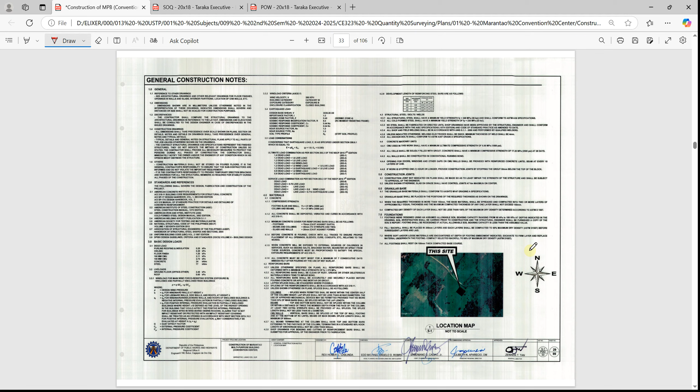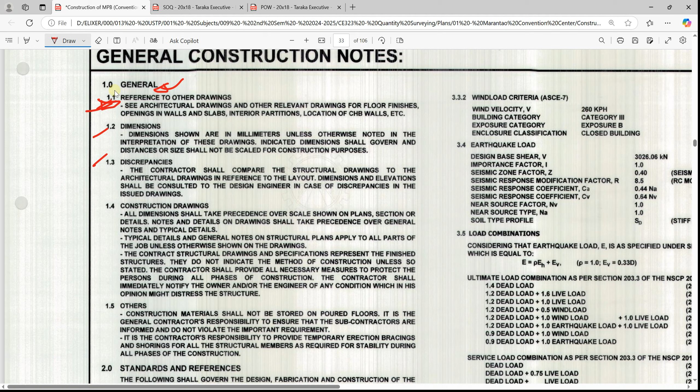We have here very detailed specifications. For example, kani general, sa may nasa kuan, general. Butang na to pinakauna. Kung naay discrepancies sa dimensions, the plans, as the designer kung may mga kalibugan, clarify. And then iya pong giingon diri nga see architectural drawings and other relevant drawings for finishes, walls and slabs, interior partitions, location of CHB walls, etc. Because these things are not structural, they are part of the architectural plans. Asang wall, asang openings, etc.

Standard references, yung tanawin diri for the structural plans, may mga references na to. For example, American Concrete Institute, ACI. Unsa nga mga codes involved? 318-11, SP-17, SP-17A, ACI 315. And then we have also AISC, AISI, the American Welding Society, the ASTM. Of course, di mawala si NSCP, the ASEP Handbook, the UBC, Uniform Building Code, the DPWH Design Guidelines, Criteria, and Standards.

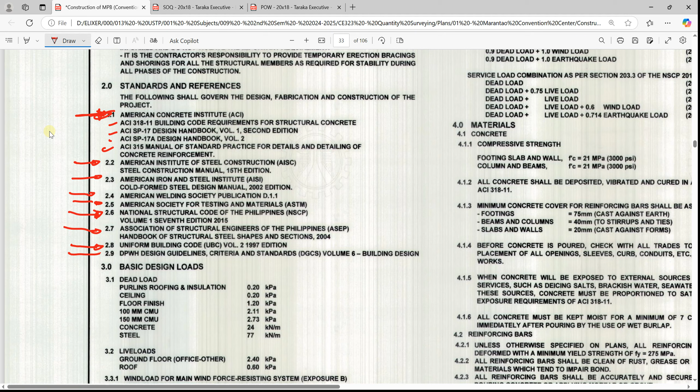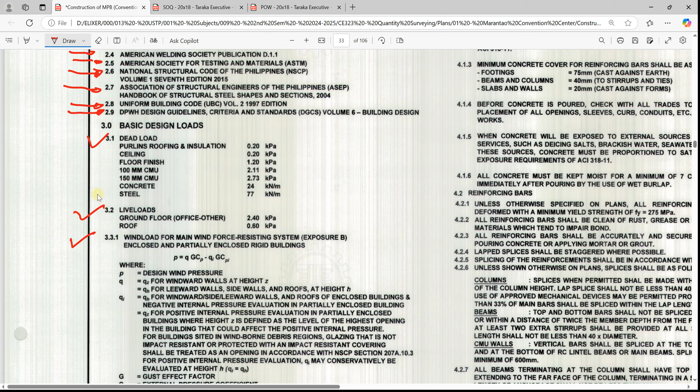Aside sa mga codes, kaning mga loads na to, we have si dead load, si live load, yung wind load. Actually, we have an updated version of this one. Kani medyo karaan na, ng 2015. And then kung nato yung dead load, live load, wind load, dapat yung mga wind load criteria - the wind velocity, yung si category of the building, exposure type, and enclosure classification. We have also the earthquake load.

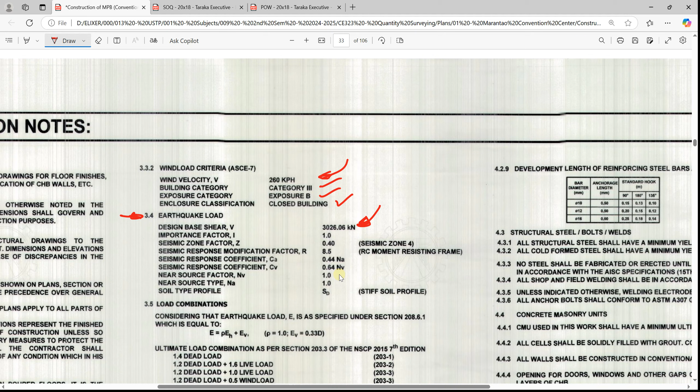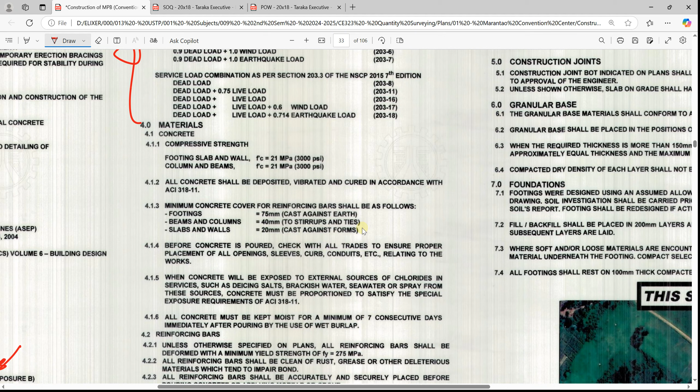So in your next year, you're going to have the earthquake engineering, mag-calculate mo ng seismic or earthquake load. For this, nakabutang gino sa dira kada plans nga ang iyang design base shear is 3026.06 kilonewton, kung sa mga factors involved, and etc. And aside sa mga loads, we have the load combination nga gigamit. And then the materials, the compressive strength, the clear cover, etc.

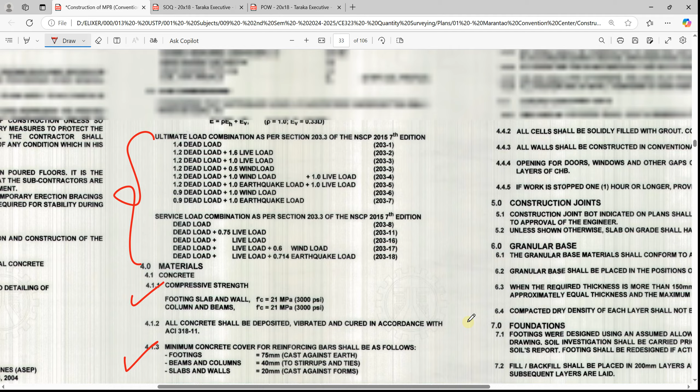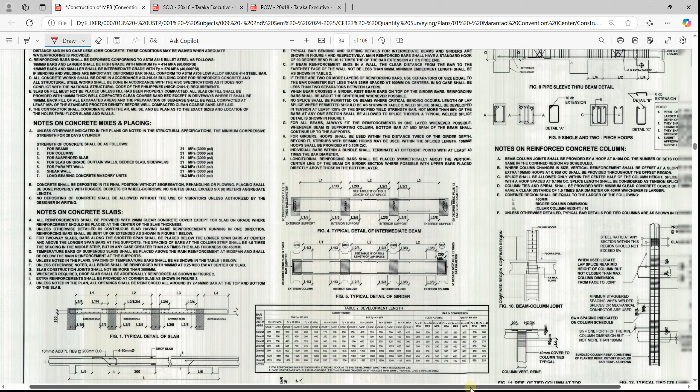Mga work specifications, these are also being presented here under the general notes. Napakaninay din kaning sa mga bars, sa dapat pakaplastar - mga splicing, bends, development length, and others as part of the general construction notes.

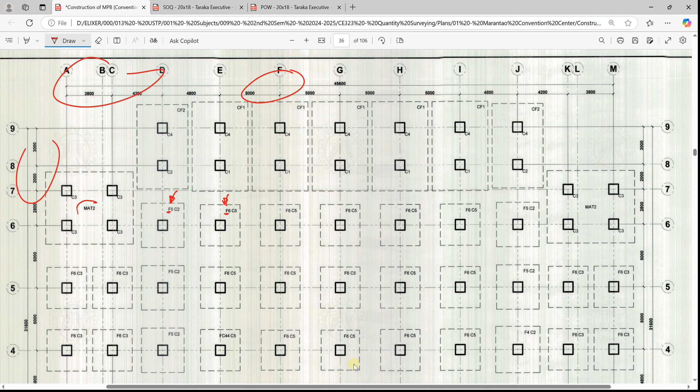Now, first nga plan is we have the foundation plan. Sa foundation plan, let me zoom this in. Sabi na foundation plan, sir. So, we have the grid lines, the dimensions, and diri sa foundation plan, imo na makita kung unsa nga foundation mo gigamit. For example, diri we have F5. Diri we have also F6. And then diri, we have MAT2. Na diri po si F2, si F1.

Unsa man, sir? So take note that these are what we call the marks. So for this one, this is the foundation - this is the foundation mark or markings. Mura siya kuan ba, mura kudigo nimo or name nimo nga para nga foundation - Footing 5, mat 2, CF1 is combined footing 1, etc. So depende po na kung sa imong gamiton diya nga pangalan.

And then in the foundation plan napod kay column marks. Natay C2, natay C5, C3, we have C4 diri and CC2. So take note, generally in the typical plans na may makita nga F1, C1, F2, C2. But take note na hindi sila always true nga si F1 yung pares with kay si C1, and si F2 yung pares with kay si C2. Ang naman si F1, F2, this denotes what type of foundation is there - murag pangalan niya, kanimo ni si footing 1, footing 2. Kani si C1 o CC2 po, mo po yung pangalan ni column para dira.

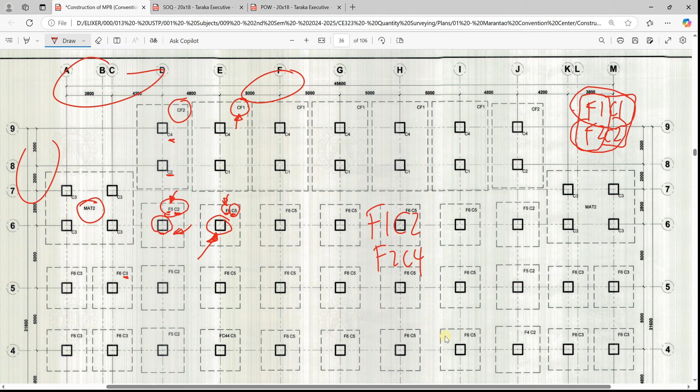So for example, ani you have the F5, C2. So sa ato pa, this is footing 5 or foundation 5, and then ang column diri is si column 2 or C2. And then diri, we have F6 and C5. So sa ato pa, ang foundation diri is si foundation 6, but si column is C5. Mao po na siya iyang pasabot. So pwede dahil siya nga F1, C2, F2, C4, etc. Depende sa result sa inyong design.

So, unahon yun yung plans, mga pagka-plaster. We have the foundation, and then we have the grade beam framing plan, and as well the wall footing plan. So unsa man ni siya diri nga beam? This is GB2, this is GB6, and then we have GB3, and then napo tayo mga wall footing diri. Ay okay, na diri silang wall footing, WF ang wall footing. So kung wala yung WF1, WF2, sa ato pa same ready sila. Or if WF1 lang tanan, sa ato pa, wall footing 1 lagi sa tanan.

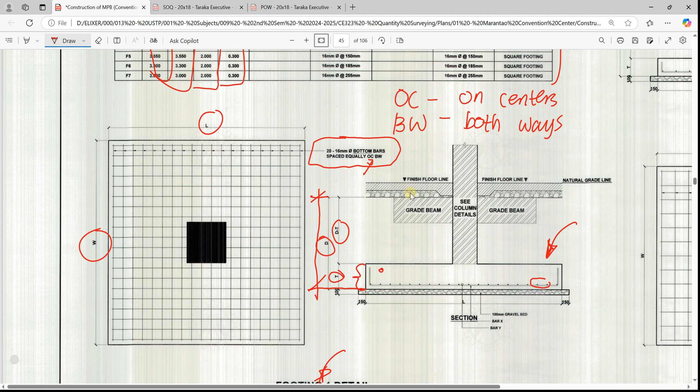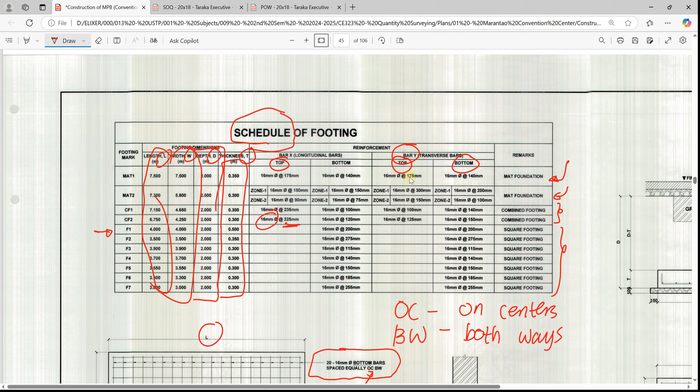So depende na ni kung unsay ipangalan ninyo, pwede bar x, pwede bar y, longitudinal bars, or depende na siya, transverse bars.

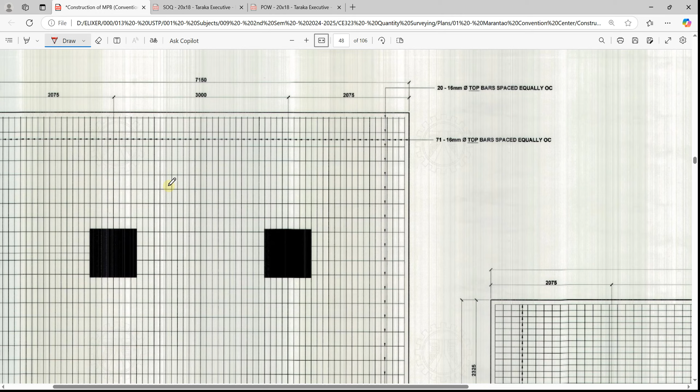Okay, preanyo, combined footing 1 detail. So nakabutang na diri nga si bar y 71 ka 16 mm, si bar x is 20 ka 16 mm diameter. And then lagi na siya dimensions pod.

So kaning duha ka column, ilang spacing is at 3 meters, and then dili na dimension diri nga sulat instead of LW. This is the top bars for combined footing 1 and bottom bars for combined footing 2, and then etc.

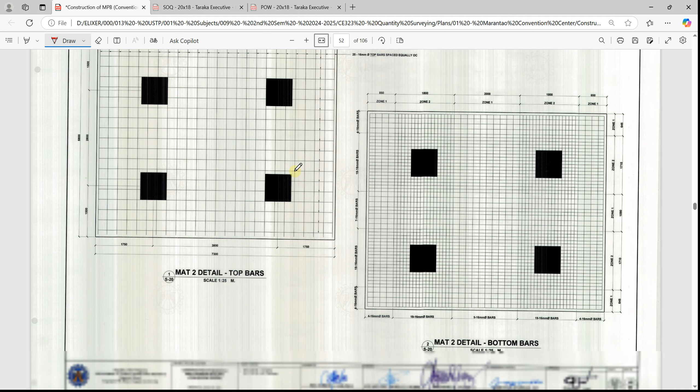We have the mat 1, si mat yes, bottom bars mat 1, mat 2 nga top bars. This is the top bars ni mat 2 and the bottom bars ni mat 2.

Then nakabutang diri Zone 2, Zone 1, Zone 2, Zone 1. So sa lain-laing zones, lahi sila spacing. Kung tan-awon sa Zone 2, masigkit ang spacing compared ni Zone 1.

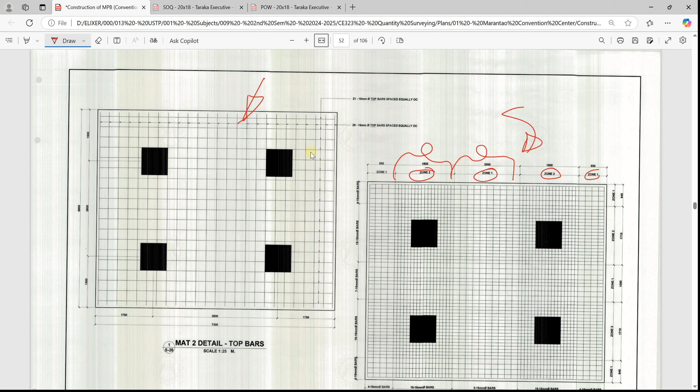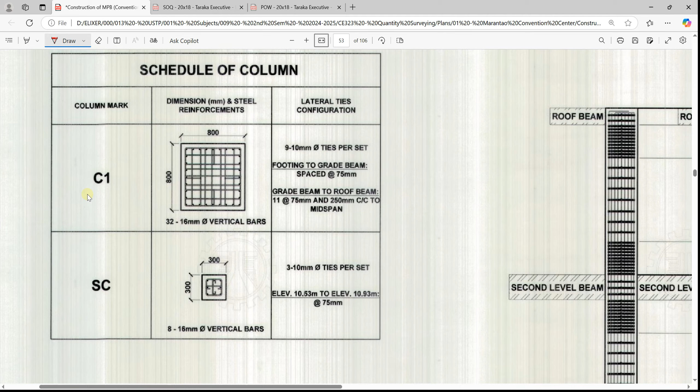And then after that, we have the column details. So sa column details, sa column nga part, naa tay schedule of column, and then the details.

Ana, kung saan na siya, pila ang ties diri, di ba? Spacing, pila ka buok main bars, that is being presented there.

And then the grade beams, naa tay schedule of beams. Okay, let me zoom that in.

So maning example, for example GB1, naa tay siya dimension, 400 by 550. So kani si GB1 naa siya 20 mm nga bar and 16 mm. So sa 20 mm, we have the left midspan and the right.

So as much as possible, ako hindi na pareho, aron di malibog si contractor, asa may left, asa may right diri. Pasabot lang, these are the support bars. No other name nila, support bars.

Left support, right support. And then sa top bars, naa siya 6 ka 20 mm and kaning nata 5 plus 2 ka 16 mm. So may pasabot ana ko. Kaning plus 2, mo ni siya murag sa ubos.

So aron di mo malibog, and then by the way, we have the stirrups dayon. So mo ni ang stirrups, 10 mm diameter stirrups 4 leg.

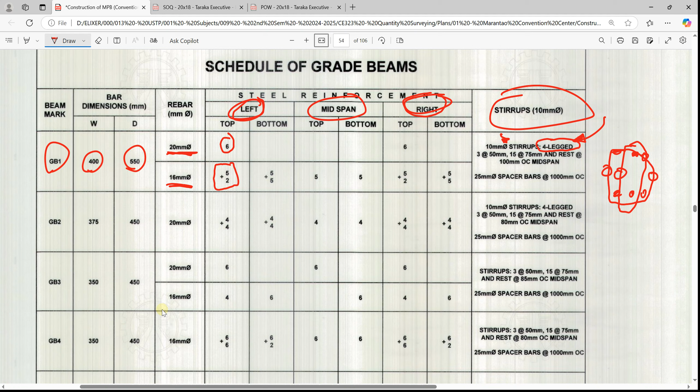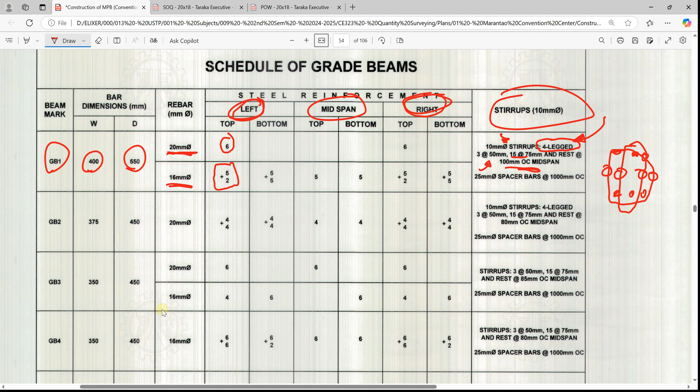So 1 leg, 2 legs, 3 legs, 4 legs, mo na meaning sa 4 legs. And then naa tay siya 3 at 50 mm, 15 at 75 mm, and rest at 100 mm OC midspan. And then nabutang siya ang gingon nga 25 mm spacer bars at 1000 mm.

So unsa man na sir? Naa rin ka diri sa details. Ay, mo din si GB1 sir. Okay, imo din ang tanong si GB1.

Ang spacer bars, di ba naa tay ga-layer man ang bars, subutangan na ni mag spacer bars dayon, para sa layering. Ano siya si spacer bars? Minimum niya is 25 mm. Dapat 25 mm na siya.

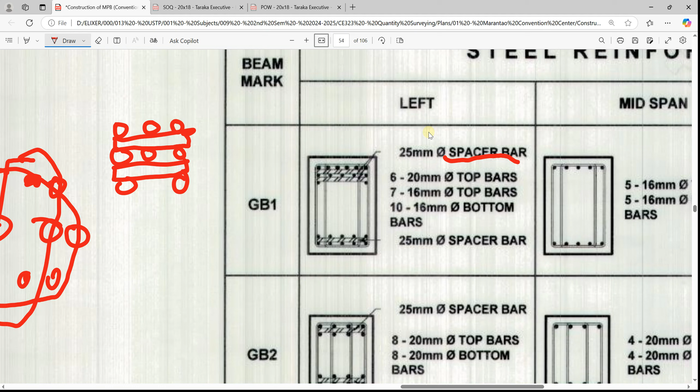And then naa din 6 ka 20 mm top bars, then 7 din ka 16 mm top bars. So unsa man ning 7, mo ni si katong 5 plus 2.

Ang purpose lang sa 5 plus 2 is makita ang placement, nga diri day naa si 5 diri and diri is naa 2. And sa bottom bars, same gihapon.

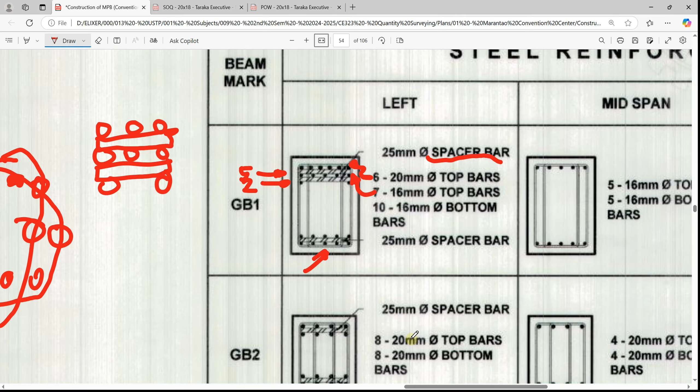And then we have the midspan. So mo po siya sa midspan and then sa right, etc. Mo na siya inyong tan-aw. Sa pag-quantify, ang usa sa pinakakutid is kani, mag-quantify og bars, rebars.

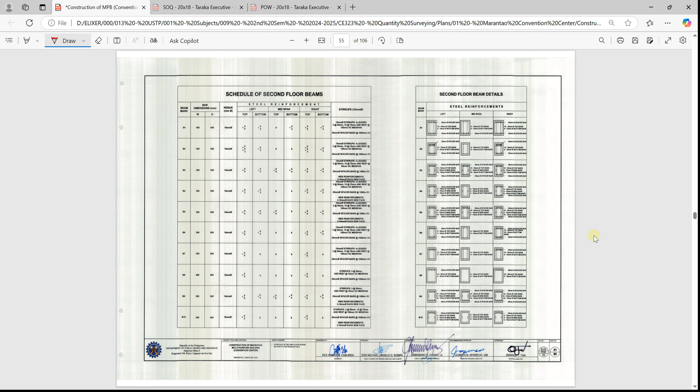And then we have the second floor beams, roof beams, and then we have the roof framing plan. Sa maning roof framing plan?

Diri sa roof framing plan, di ba, naa may roof plan. Sa roof framing plan, makita nimo kung unsa nga trusses imo gigamit diha. So nakaplano na siya diri si truss 1.

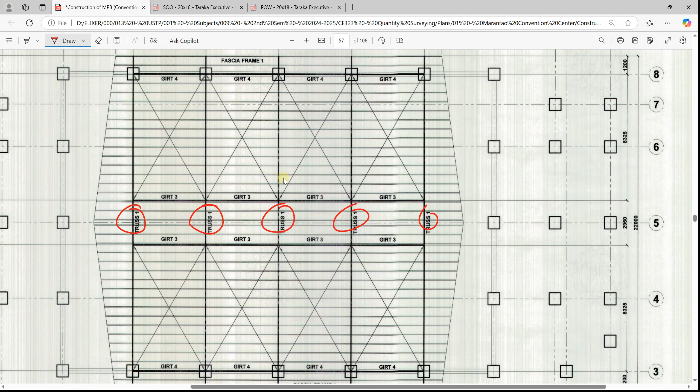And then naa tay girt 4 diri. Naa tay girt 3. Tapos kanang frame for the fascia board gani, napo na siya frames man. So imo na butangan og fascia frame 1, and then buhatan na nimo siya of details.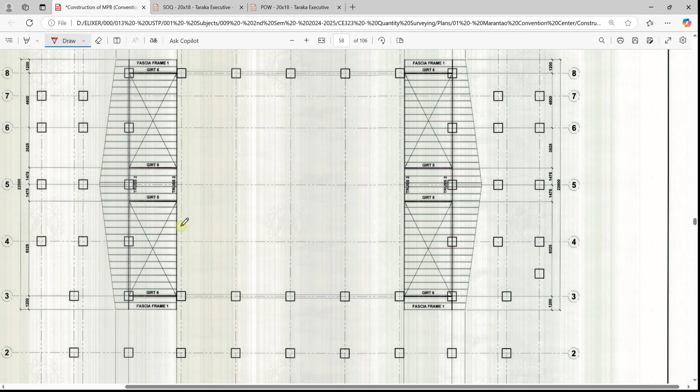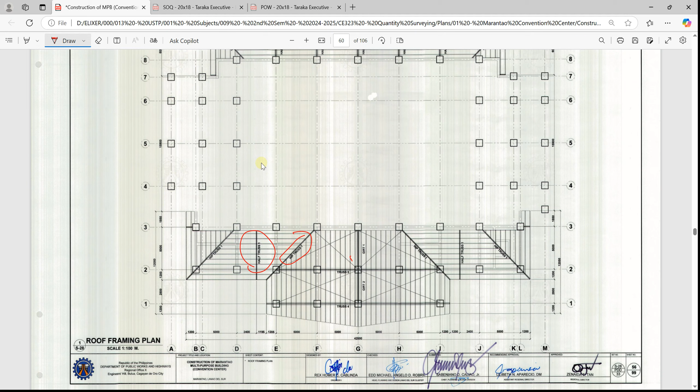And then kanipod lain pod nga roof framing diri nga part. Then we have the half truss 1, hip truss 1, girt 1, etc. And then we have the details.

Ay, mo din itsura ni truss 1. Unsa din nga material ang gigamit? Kani si purlins, diameter ni sagrod, unsa ang members. So for these members, yung gigamit is 100 by 50 by 6 millimeters rectangular tube.

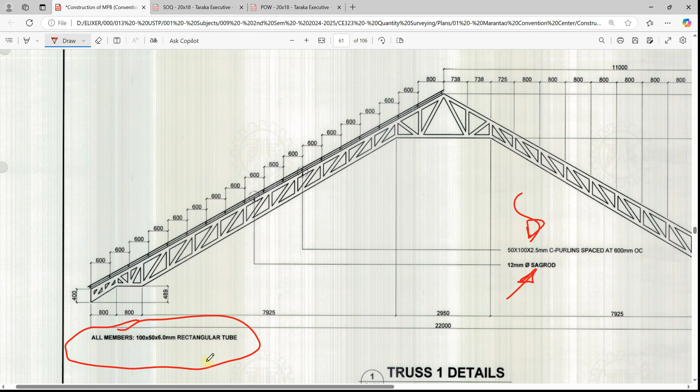And then you have the dimension for the truss, of course. Si girt 1, and then you have the details of that. You have the plan first, and then you have the details.

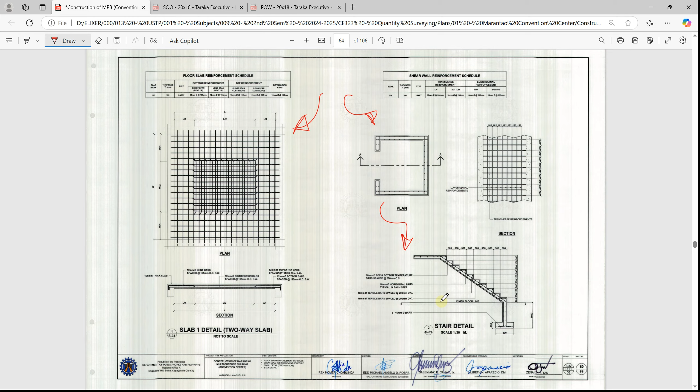And then the slab, so the slab details. Details of the slab too. And then we have the shear wall reinforcement schedule, this is for the part here which is the elevator. And then the stair details, always needed, stair details. What is your reinforcement for the stairs? For the ramp, complete, everything with rebar you plan, you put in the detail.

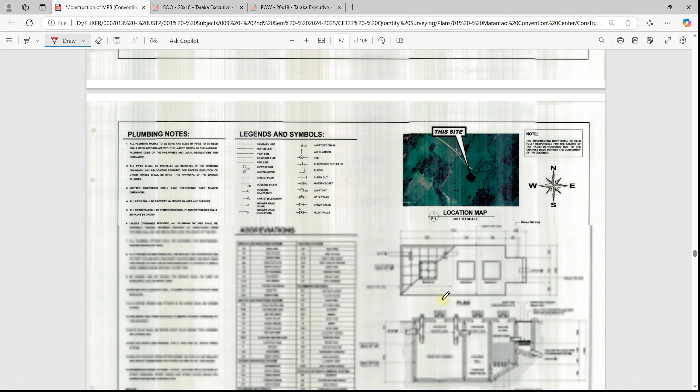And then you have the plumbing plans. Of course the plumbing plans, you also have the notes. There are symbols here too. And then dimensions as well, for the septic tank.

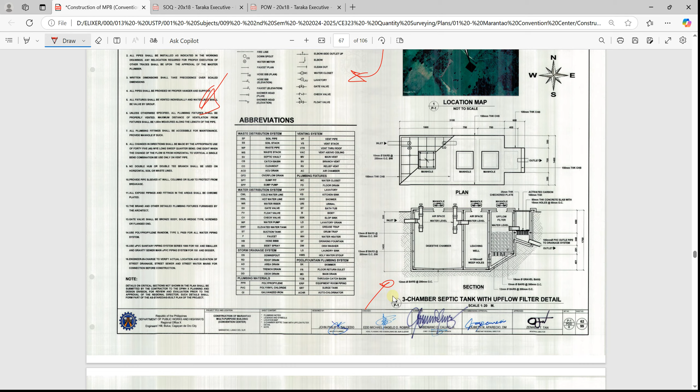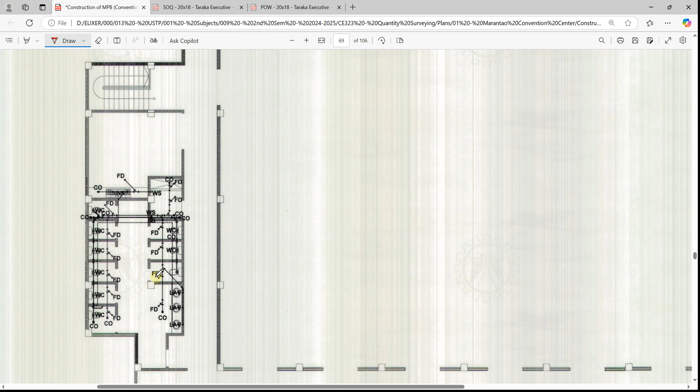This is the waste line layout, where the waste line will pass through. And then we have the second floor waste line layout, that's for the CR areas, this part, floor drains for the water closet, etc.

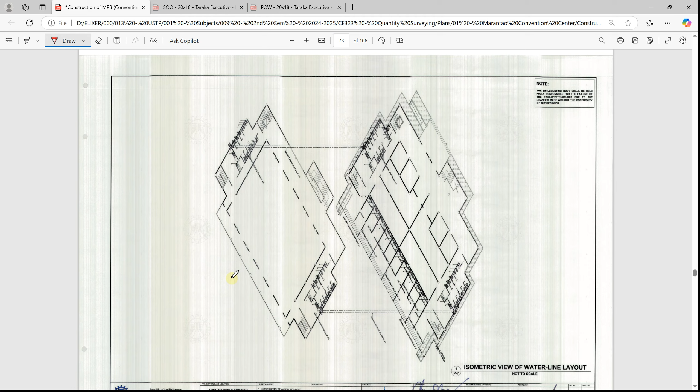And then the water line layout, where the water will pass through. So this is being presented in the plumbing plans, second floor water line layout. And then you have the isometric view of the water line layout, where you can see the plastering.

And then the isometric view of the water line layout. Then the other details too, the canals, floor drains, catch basin. So these are being presented in the plumbing plans.

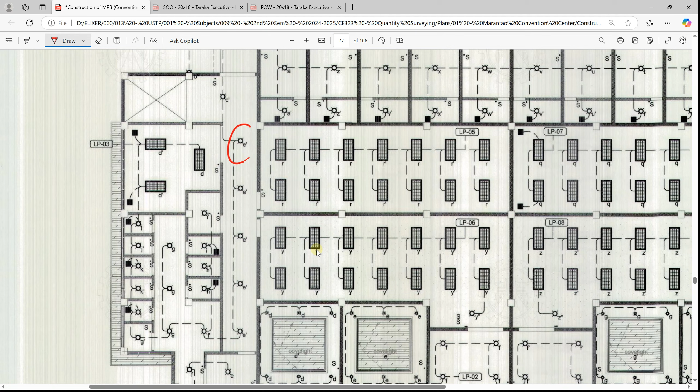And then the electrical plans, of course, we have the notes, abbreviations, symbols, to help understand the plan. So we have the ground floor lighting layout. In the lighting layout, aside from the lights placed there, there are also circuits shown, lines, and their series, etc. It is being presented in the electrical plans.

Ground floor lighting layout, so this is for the ground floor lighting, and the ground floor power layout, the outlets. So it's planned where the refrigerator is, the convenience outlets, the CO. Then second floor lighting layout, second floor power layout, and the schedule of loads.

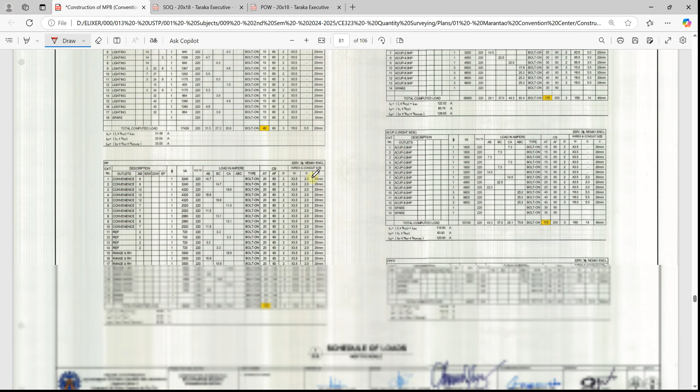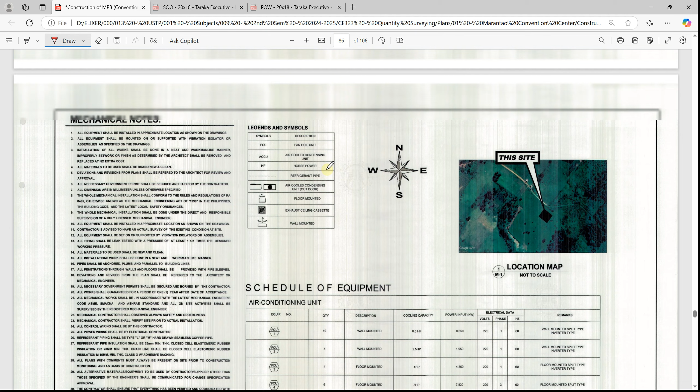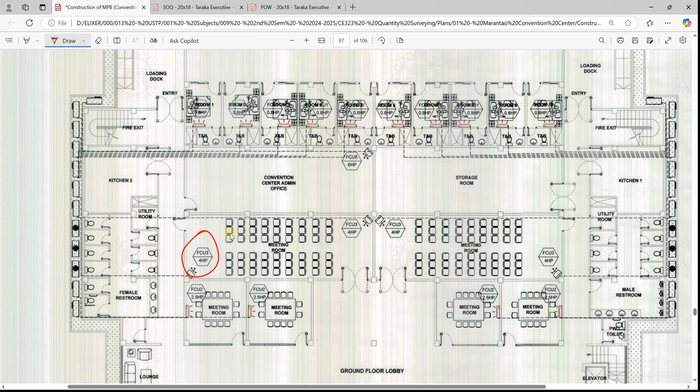And then the mechanical plans, with notes, symbols, and the equipment shown here. We have the wall-mounted air conditioning unit, exhaust ventilation. So the plan shows the location. This is the ground floor air conditioning layout, showing where the aircon units are located.

That's part of it, and then the plastering per floor, and the ventilation, and others.

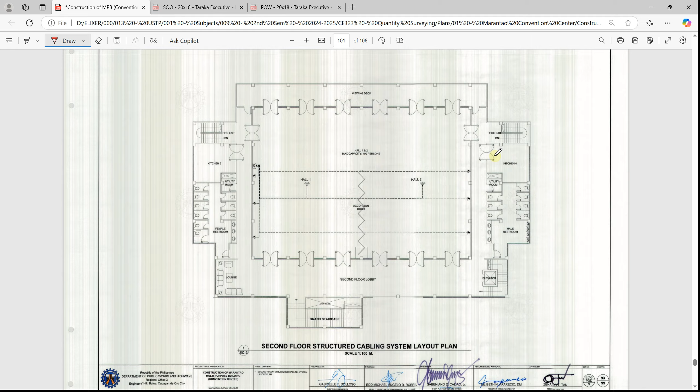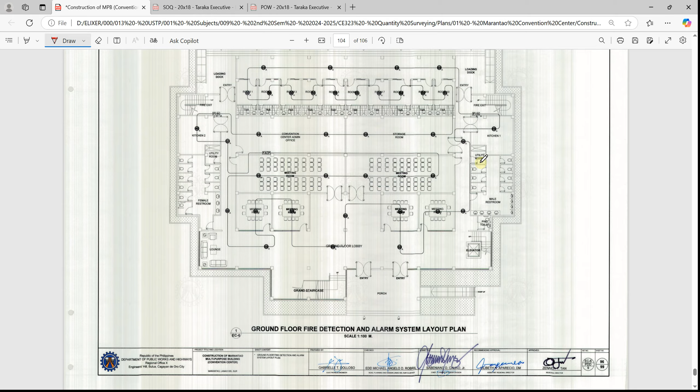And as well the CCTV, you really need to plan the CCTV because once it's plastered it can't be changed anymore. This should as well be presented in the electronics layout plan, ground floor and second floor CCTV system, and the ground floor fire detection and alarm system. So the alarm systems is part of the electronics, and the CCTV systems, etc.

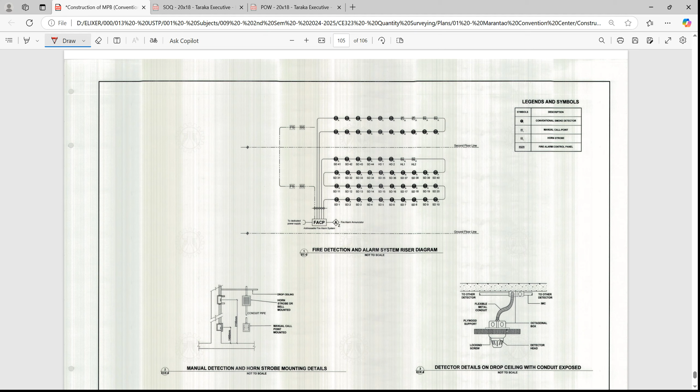So this part, these things, this is just a brief discussion on engineering plans and architectural plans, the specifications present, and others. Next discussion, we'll be tackling the quantities.